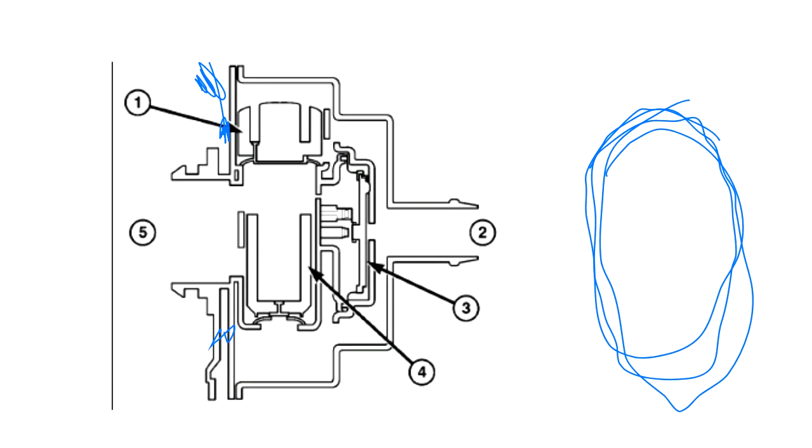Now, over here on the other side of this, so our charcoal canister sits here, sits over here. This is our canister. But over here on this side is a hose that pretty much goes to a vent.

It goes to a vent. Usually sometimes it has a filter in it, sometimes it does not, depends on the vehicle, and that's where our fresh air is going to come from. So this is going to hook right on there where the fresh air vent on the charcoal canister would be. So this is going to be that big hose on the charcoal canister.

And we're not even going to put a hose on it. We're going to put the ESIM switch on there. Then the hose hooks onto the ESIM switch. So that gives you an idea of where this item is located, right on the charcoal canister.

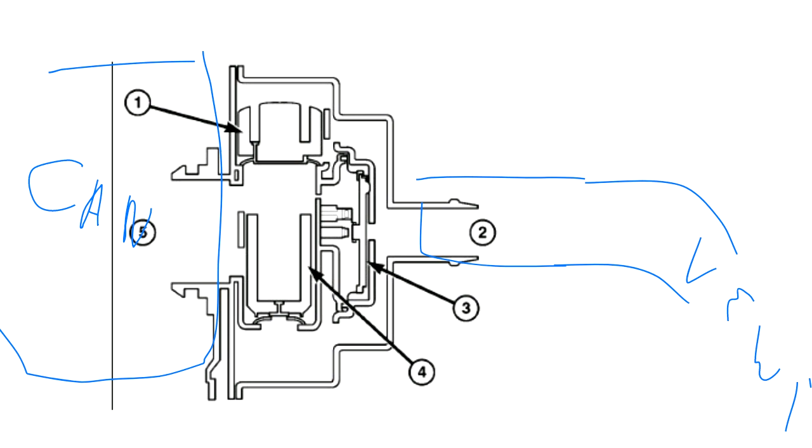There is a connector that goes to it, a 2-wire connector, because there is a switch in here, right in here. This is the switch. So the switch, you can see one terminal is here, one terminal is here.

So the switch, all that happens with this is we're going to let nature do her thing. If you don't understand what I'm talking about, a natural vacuum: if something gets warmed up and you seal it off and then it cools down, the pressure inside is going to decrease. It's what we call natural vacuum.

If you want a good idea of how this works really fast, go take an empty 2-liter bottle or plastic drink bottle, turn on the hot water on your spigot and fill it up with hot water. Dump that hot water out and immediately put the cap on it. You're going to have a lot of hot air in that container. Sit it on the counter and it'll probably take about 5 minutes and you're going to actually hear it crush itself.

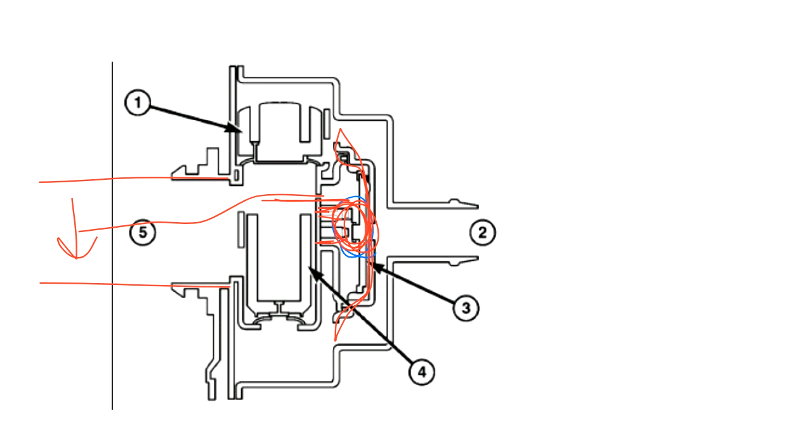And there is a diaphragm that comes across here, and right here in the middle of the blue is a metal contact. So you see where I just drew, and I'll clear that off so you can see it. So now if this diaphragm pulls inward because vacuum drops, that will make connection across these two terminals and it closes the switch.

That gives it its name, ESIM switch. This is actually called an ESIM detector. Stands for evaporative system integrity monitor, means it's all contained in one. The switch and the leak detector are all in one.

That creates the vacuum, pulls that diaphragm open or closed, and that closes the switch. The ECM sees the switch close, and it says, hey, we pulled a vacuum on the gas tank, on the hoses, and on the charcoal canister. We don't have any leaks. We pass the monitor. Very, very simple.

Now, there's a couple other pieces in this, and these pieces will tend to come into play and create a couple other problems for us. It's not uncommon to get a code for the ESIM switch, but the code for the switch generally isn't due to a switch failure. It is generally due to a piston failure. There are two weighted pistons, or valves, call them what you will, in this assembly, and they do different things for us.

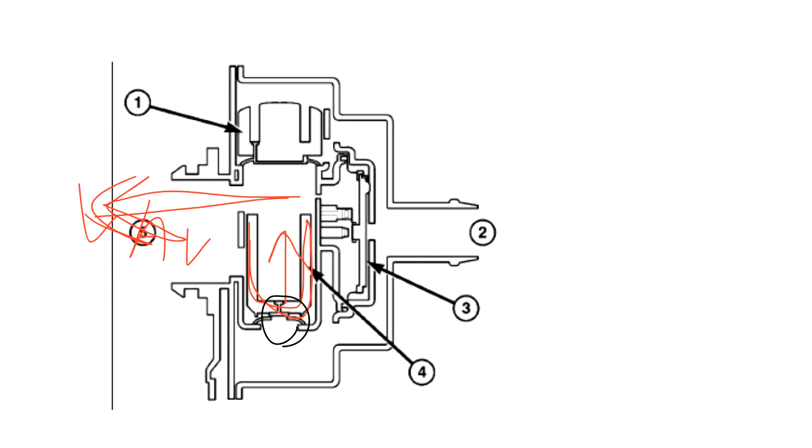So if we produce a vacuum inside of the tank, then we are trying to pull air out of this cavity. So air is trying to leave out of here, and it will lift this valve straight up. And right here at the very bottom of this, you'll see an opening. So if that valve lifts up, we uncover that opening, kind of like picking the stopper up out of the sink to drain the water, and air now will be able to come in through the vent hose, come right in around here, up through that valve, and come over and replace the air that's in the tank till the pressure is relieved. And when the pressure starts to equalize, then the valve will drop back down. Really simple. No springs. It just goes off of the weight of the valve.

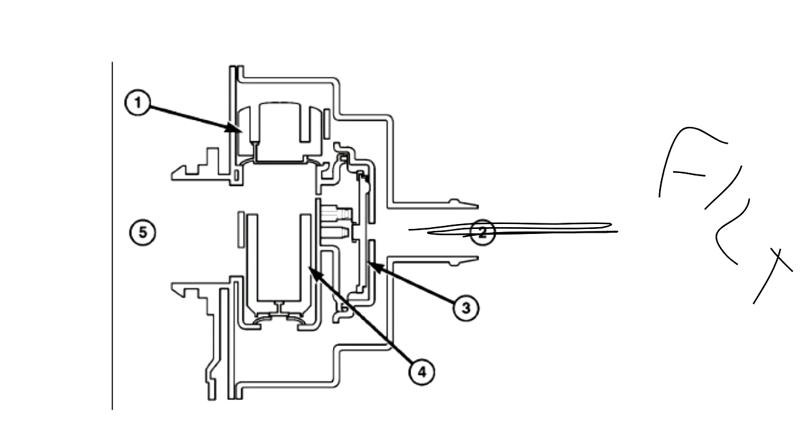And it's calibrated so it takes a lot more vacuum than what it takes to close the switch. Well, what if that valve got some dirt into it? Remember this air that's coming in over here from this fresh air? What if it gets some dust or some dirt in it? So there should be a filter in line. There should be a filter in here so we get fresh air in. It's not a replaceable filter. You can get them, by the way. You can get them if you have to, if they become clogged. You can get them, but it's there to try to make sure we keep clean air. So if you get one of these sticking, don't be afraid to replace the filter on it along with it.

If air comes in and we get little pieces of dirt in here, what if some pieces of dirt got up on that seat? It could make that valve stick. Now we've got a leak. We'll set a code for the ESIM switch because we never see it change states, but it could just be the valve sticking.

I will tell you, I have taken these out before and shaken them around, and you'll hear the valves moving. You shake them lightly and you can hear the valves kind of jumping around in there. I have done that before, put them right back on, and they would work. It would take care of my problem.

The problem is there could still be some dirt in here that the next time this thing inhales air, it gets stuck in that valve. So if that happens, get a new ESIM switch.

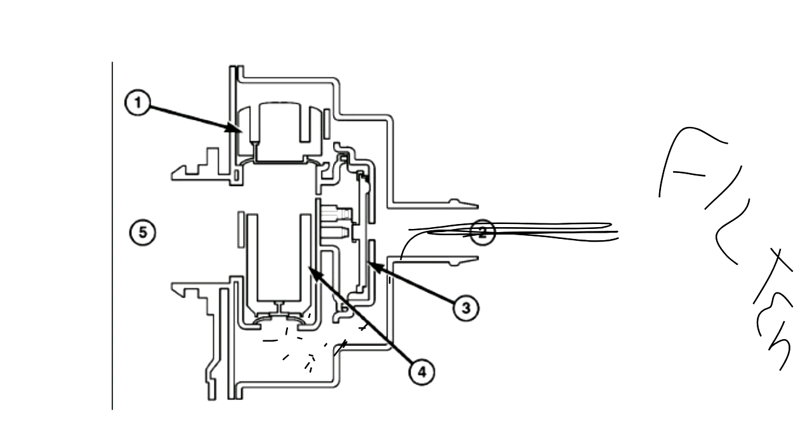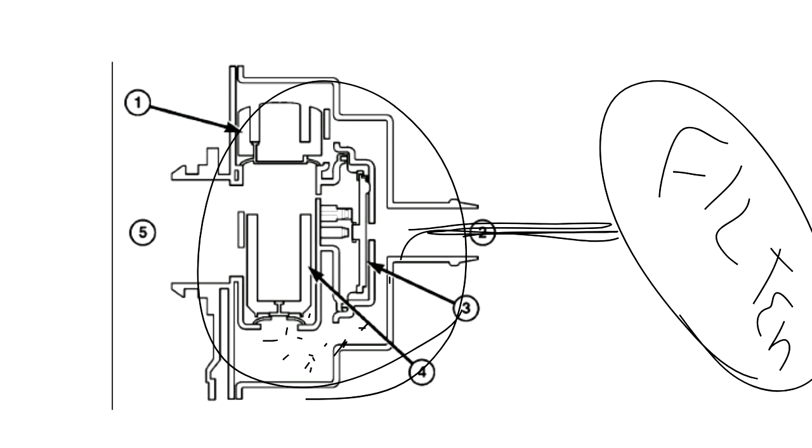I'm going to get this whole assembly right here and replace it. And if it's got higher mileage on it, or if there's a lot of dirt under this vehicle, looks like they live on a dirt road, or maybe they like to go off-roading, I'll probably get this filter and replace it along with it. Blow the lines out while you've got it loose, just blow some fresh air through them. Try to dislodge any dust and dirt that's in there and get it out of the line. Put it back together—it'll help get rid of a repeat failure.

Now, what's the other version of this? I get up in the morning and get ready to go to work, and it's 30 degrees outside. I head into work, and while my car's sitting outside, let's say it warms up to 60, 70 degrees outside. That pressure has built up inside the gas tank, so there's got to be a way to get rid of the pressure.

Now, if this is pressure inside of here, pushing through, it's going to push this valve down. That's just going to seal it off even better than it was sealed off before. So that's the job of this one right up here.

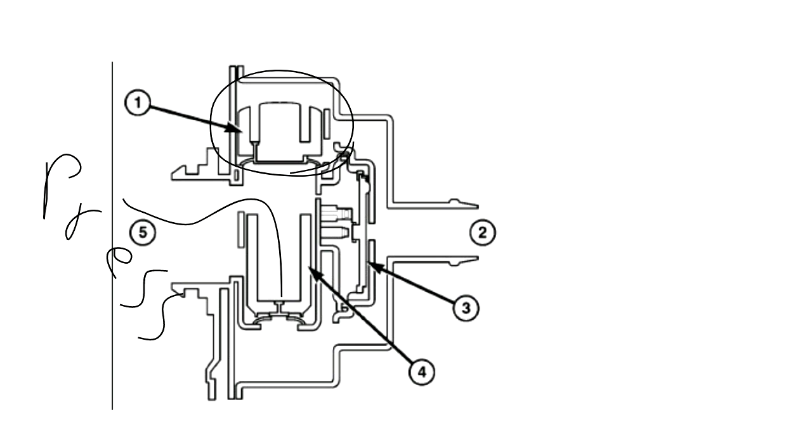So the piece on top that you see there—if we get pressure coming in, trying to get out of that tank, it's going to push up on this valve. It will move up, and now the air will go right through the side of this valve and right out through the filter. So the one on top relieves pressure in the tank.

The one on the bottom relieves vacuum in the tank, and it doesn't take much—2 to 3 psi, and the valve on the top dislodges and releases pressure. 4 or 5 inches of vacuum, and the one on the bottom is going to move up, dislodge, and allow pressure into the tank so we don't collapse the tank. Fairly simple system, right?

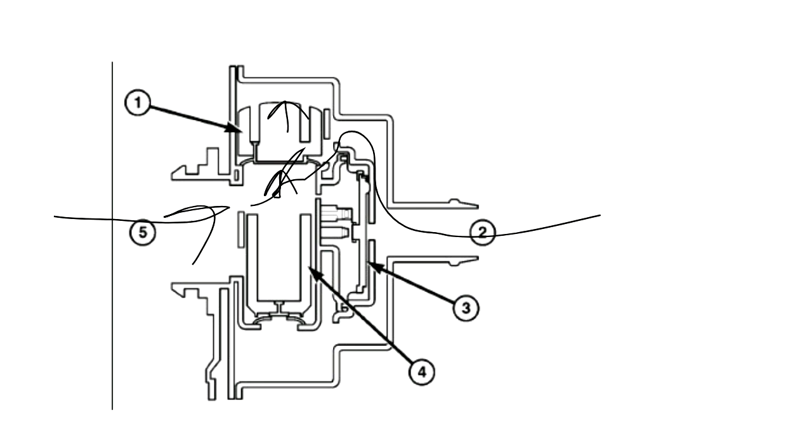Well, there's one more piece to this animal, and that is called onboard vapor recovery. So for onboard vapor recovery, the EPA said that when a gas tank's empty, it's not empty. It might be a 20-gallon gas tank with 2 gallons of gas in it, but that means it has about 22 or more—maybe 25 gallons—of gasoline fumes in it.

So originally, and this has happened in some states—they hopped on it early, I think California is one of them, maybe Illinois—originally they came out and said, hey, you've got to recover all those vapors.

When you put gas in an older car, you may notice the gasoline smell around the car. You may notice it coming up if you stand there holding the gasoline nozzle—you're going to smell the gas fumes coming out of the vehicle. So what they did is they said we've got to capture those. We don't want, every time you get gas, to put 25 gallons in volume of gasoline fumes out into the air. We've got to capture those and recycle them.

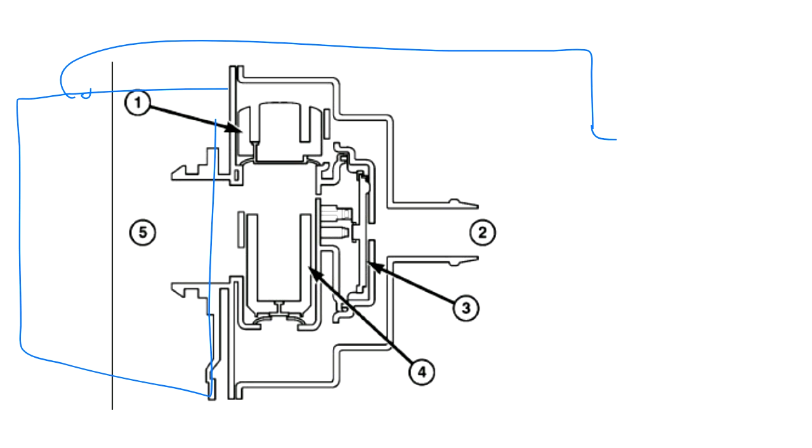Well, remember the vent line that's on top of the gas tank. It goes to the charcoal canister. So what we're going to do with this system is, when we're doing a refueling, our charcoal canister is this box sitting right here. It's got a line coming off of it that goes over here to our gas tank. I'll just draw a little gas tank, and here's a filler neck. So you're putting gasoline into the vehicle, pouring gas in here and filling up the vehicle.

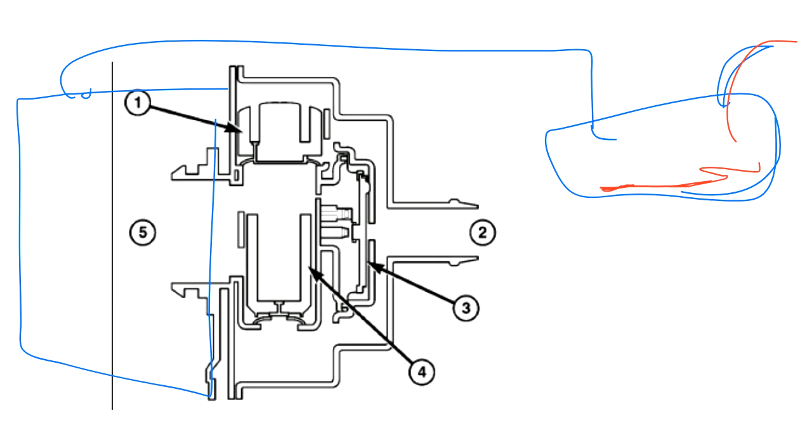While we're doing that, the fumes that are in here, all up in here, they're going to go up and follow this hose, come through the charcoal canister. We're going to capture all of the hydrocarbons, and the air, the oxygen, nitrogen, what have you, will continue on through and come out here. It pushes this valve off of its seat, and then it continues on out to the atmosphere. That's onboard vapor recovery.

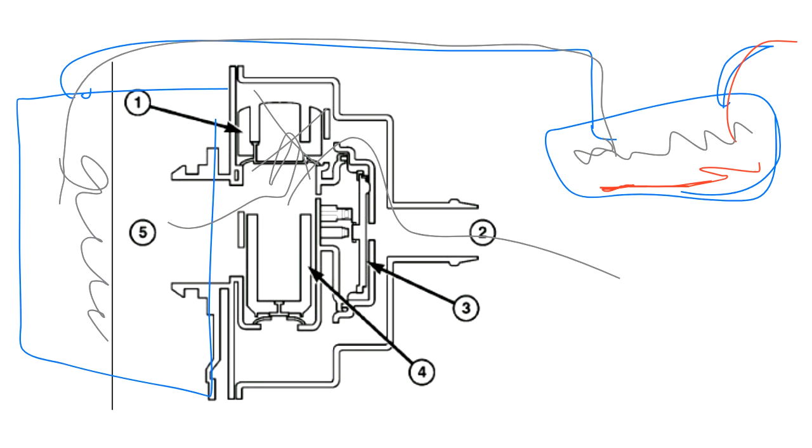To give you an idea of things to think about, what if this valve stuck? Now when I put gas in, the fumes try to go out. They get in here, but there's nowhere to go. So pressure builds. That shuts off your fuel pump, your fuel nozzle, and it doesn't take very much. It happens really quick.

If you can't get that air out, you're only going to get maybe 50 cents to a dollar of fuel in. You're only putting about half a gallon at a time before it clicks off, and then you've got to let it sit for a minute and try it again, putting a little bit at a time in the tank. If you got a big gas tank, like I do, a 20-gallon one, it'll take forever to fill this thing up. It can take half an hour to an hour just to get 20 gallons in there. So it's going to take a really long while.

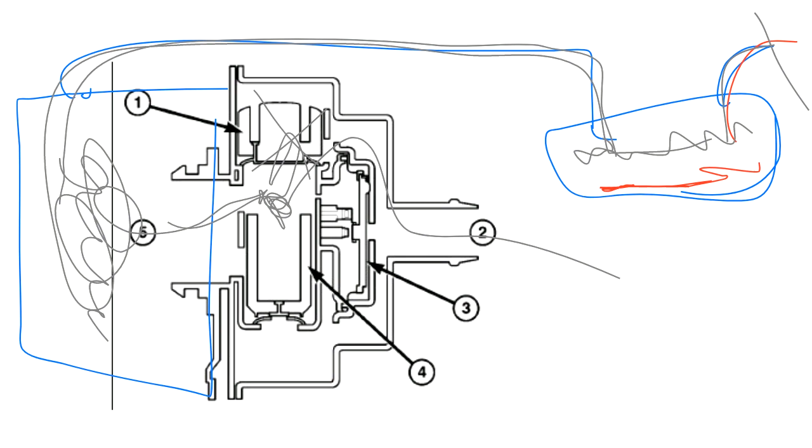So keep that valve in mind if you have a problem with putting gas in the car. That's called onboard vapor recovery.

So let's take a look at another system that we're going to use. That's a fairly simple system. Two wires, that's all we added to the car. Two wires and a switch, just an on-off switch. If we pull vacuum on it, it closes the switch, test is good.

So let's look at a system. This system is fairly common, though the slides I'm going to show you are from Toyota. It is a fairly common system. So look at some of these pieces that we've got. I'll just point out a few of these so you realize that we're there.

To start with, what's going to make this work is right here in the middle, we have a vapor pressure sensor. So this one, instead of being a switch, it's actually a sensor, and it's going to measure vapor pressure. This is basically a MAP sensor, the same MAP sensor we used on the engine. On a lot of cars, it is the same sensor.

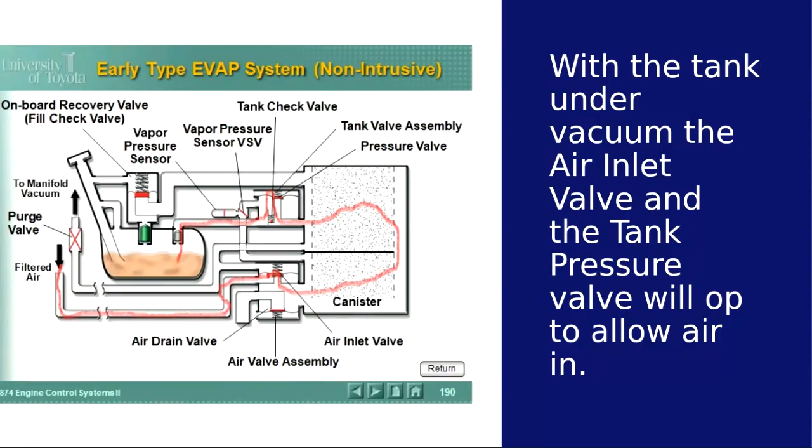So that's normal operation. Now, the next thing's going to happen with this is when we're trying to purge the system. So we're driving down the road, everything's working normally. Our computer says, hey, we need to clean all these vapors out of the charcoal canister that have been created in there from the pressure going up in the tank and the fumes trying to go out through the charcoal canister. We got to get those fumes out of there because it can only hold so much. So we got to get the fumes out of there and keep that tank cleaned out.

So what's going to happen while we're driving is now this other valve comes into play. Here's our purge valve. We're going to turn it on. That valve is hooked up to the intake manifold. So there's vacuum in the intake manifold. We're turning that valve on, and it will be pulse width modulated. So it's not just an open door. We're going to pulse it so we can control the flow of these fumes. Now, remember, we're not trying to suck fumes out of the gas tank. We don't want to do that. We could possibly suck some liquid fuel right out of the gas tank.

We only want to flow air through the charcoal canister. So what's going to happen is our vapor pressure sensor valve is closed. It's closed off. So there's no passageway through there. So our air is going to come in through our filter, come along here, in through the air inlet valve. It comes through the charcoal canister, and it is just drawn right back out through the purge line up into the engine. Fairly simple system. Works great. That's normal. That's the normal workings of this sensor.

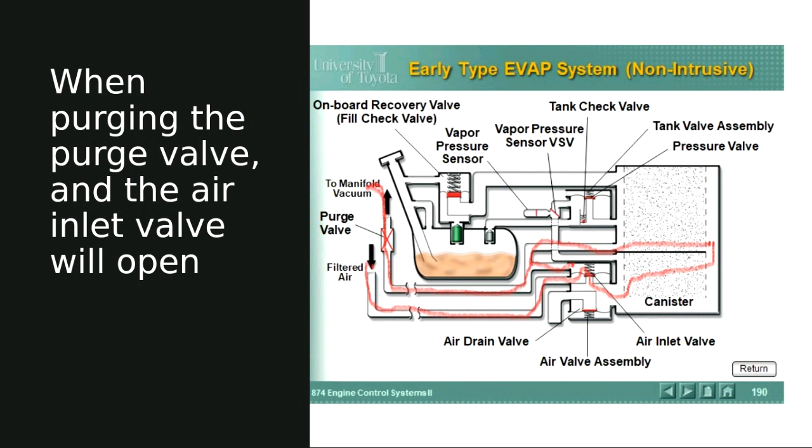Now, when we want to do a test, we want to test this thing to see does it work. We've got to test to see if this system is working properly. What we will do, and let me just make sure I don't think I have a picture on here of it. We've shut the car off.

So you've driven the car, you shut it off. What we do is we start a timer, and we're going to open this vapor pressure sensor. This vapor pressure sensor is open.

That connects everybody together. So if you look, that little red valve that you see right at the end of that line, it opens up. That connects everything together, and what it's going to do is connect the tank, our gas tank, as well as the charcoal canister, all of these hoses. It hooks them up to this vapor pressure sensor.

Now we let a little bit of time lapse, and it's generally hours. This generally happens over a period of hours. Time passes and intermittently the computer wakes up and looks at the vapor pressure sensor and sees what it reads. If it sees the pressure go down,

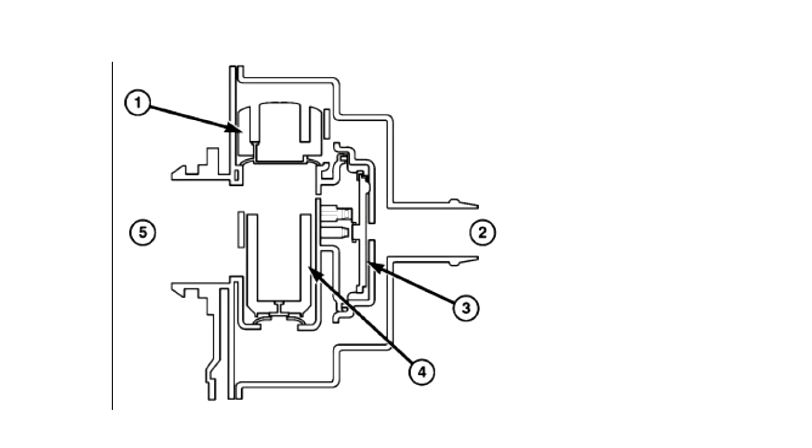so if we think about this for a minute, if we go back here to the system, if I was trying to push smoke into this system to pressurize it to see if I've got a leak, I'm going to have to get rid of this leak, because as soon as I put pressure in here, this valve's going to unseat. I'm going to have smoke come out through here. I'm not going to be able to pressurize it. So I'm going to cap this off right here. That's going to seal my system up and make it work.

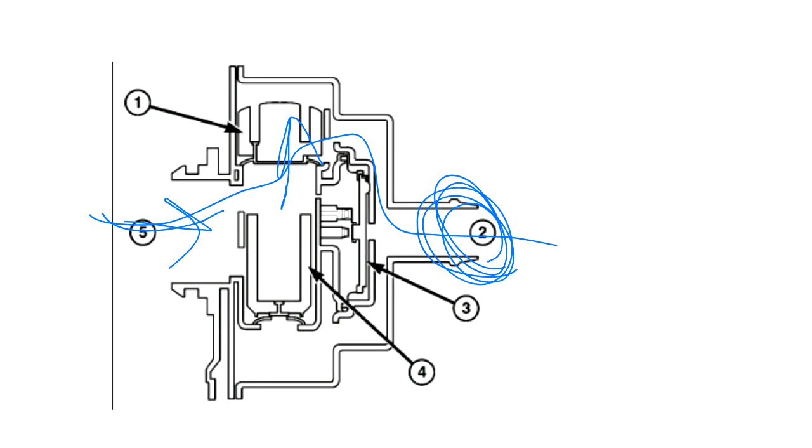If we look at the other system, if I'm going to pressurize this with a smoke machine, I'm going to have to take a look at some problems here. If I allow pressure to build up in here, it's going to come out here.

Or it's going to come out through here, one of the two. So I'm going to have to find a way to block those off so I can pressurize my system. Also, depending on where I pressurized it, because of this vapor pressure solenoid, I might only be pressurizing part of the system. So understanding what has to happen, I've got to have this valve opened up in order to test the whole system. Otherwise, I'm going to have to test it in two pieces.

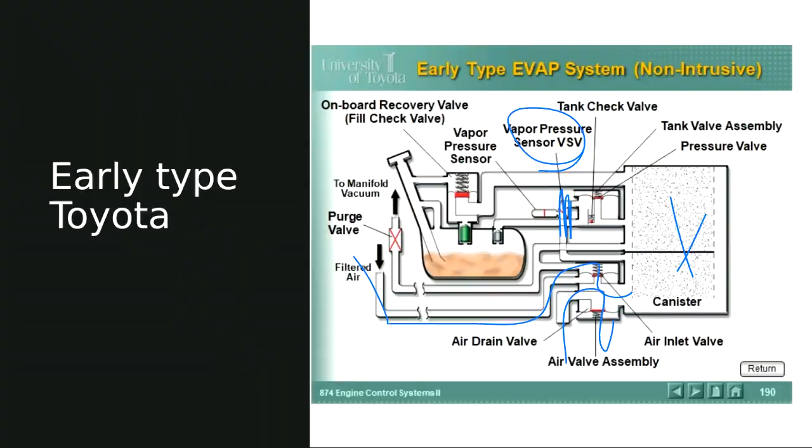So I'm going to use a scan tool to do that, and we'll take a look at some of that next week. But this is why I'm just pointing this out to you, because now we've got another system here, and this is why we need to know how the systems work.

So we've looked at two types of systems that use vacuum. We looked at the one on my Jeep that uses the ESIM switch, and then we looked at the Chrysler early, or the Toyota early system. Both of those use vacuum to test and see if they have a problem. We looked at one system on my Jeep that uses pressure to determine if we have a leak. Now we're going to look at another system that uses pressure to determine if we have a leak, and this is a Toyota system that we use.

So this system is called the Toyota late system, and what it does is kind of interesting. I used these slides from them so I could point things out.

This is going to show you where we have pressure, and it's going to show you where the parts are. This section over here is going to show you if you tapped into this pressure sensor. We've got a pressure sensor right down here in the bottom. So if we were monitoring the pressure, this is going to show you what's going to happen to the pressure over here. And we've got some solenoids. We've got a motor here, and we've got an Evap solenoid right up here. We have a canister vent valve right here. And right in here, we're going to show you what we're doing with those, whether we're turning them on or off. So we're going to go through the whole test system to see what happens.

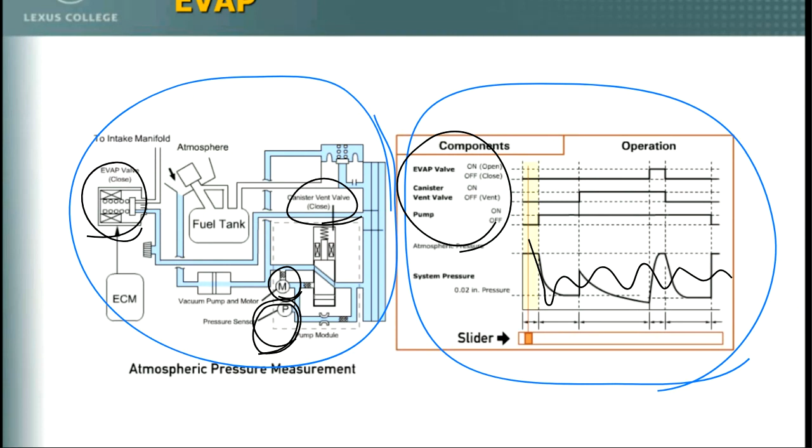And this is the test. The rest of it, checking to see what happens for onboard vapor recovery and all that, you can kind of figure that one out on your own.

Now, our fuel tank's over here. Let's just think about this for a minute. So if I was putting gas in the car, how would the onboard vapor recovery work? Well, let's draw it out. Gas comes in, fumes have got to go out, right? So fumes are going to go out here. They're going to come up here to this valve. That is our onboard vapor recovery valve, and we're going to push this off of its seat. Fumes are going to go through the charcoal canister, then they are going to come right out through here, and it's going to come right out through the filter.

Fairly simple. Now notice the pressure here in this white area underneath is greater than the pressure on top. Notice this is vented right down through here. So if the outside pressure is greater or is less than inside pressure, this valve opens up and allows that to vent through the charcoal canister. We never allow it to vent straight to atmosphere. We want to catch those fumes. So that's just to show you, you can look at these and kind of figure out what's going on as you look at them, once you start realizing what the parts are and how they're connected together.

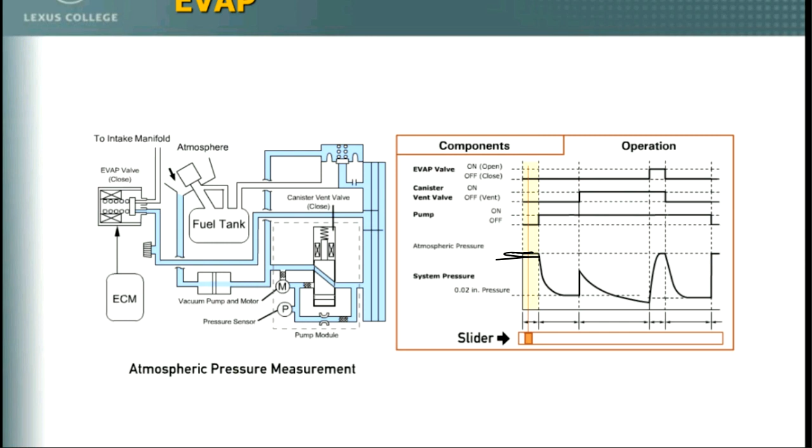In order to do that, we're going to turn the pump on and see what happens. So now we're going to turn the pump on, and you can see up here on our graph that our pump is now on. Our pump is turned on. Our canister vent valve and our purge valve are both still turned off. And when we turn that pump on, it's going to try to pull a vacuum on the system.

But since the canister vent valve is off, let's see what happens. As this pump tries to pump air out and pull air out of the system, air is basically going to flow through this valve, down through here, and come right back over. But there's an orifice right here. This is what I want to point out. They put this orifice right here in this line. That's a 20 thousandths of an inch orifice.

So basically what they're saying is this is what the pressure would be today under these conditions, under this temperature, if you had a 20 thousandths of an inch leak. And that's the reading we're going to get right here. So these are just reference points.

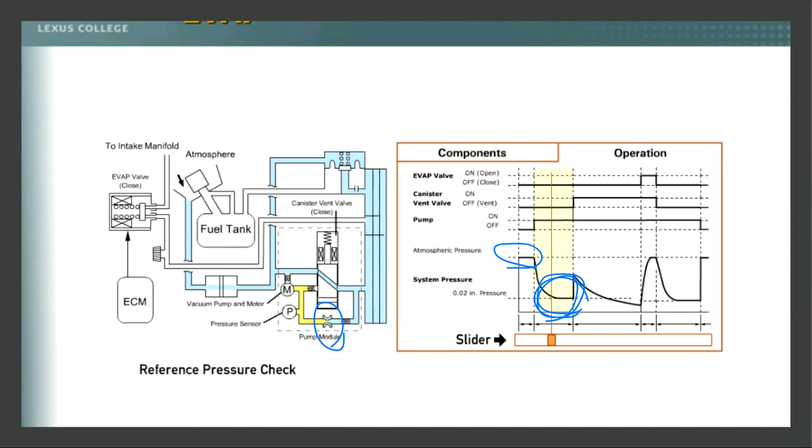So now let's leak test it. When it goes to the next step, the very next step in here, what we're going to do is we turn the canister valve on. Our pump is still on, but the canister vent valve just got turned on. And look what happens when it moves.

When it moves, we blocked off the vent right here. That vent got blocked off. We opened a passageway up through the middle of this from the pump motor straight over to the charcoal canister. So basically we took that orifice out of the pressure line because now we have an open system. So now this is open.

By the way, you'll see three of them. There's one right there, there's one right there, and there's one right up here. There's three blue marks that I just put on there. One right above the pump, right here. One right here before the canister vent valve, and one right here. Those are filters, so that we don't get any dirt into the pump and we don't get any dirt into that orifice.

If they clog, then you get the new component. Then you end up having to get the new piece because most of this is going to come as an assembly. You get this as an assembly, and so you get all new filters with it. So it is possible they could clog, especially if our charcoal canister came apart. But if they do, we'll get some codes that nothing's going on because nothing will flow through there if that happens. But that's what those little hash marks are that you see in there. Those are filters that are in the lines. You cannot replace them separately. So if they clog, when you trace them out and find a clog in that line, you get a new assembly.

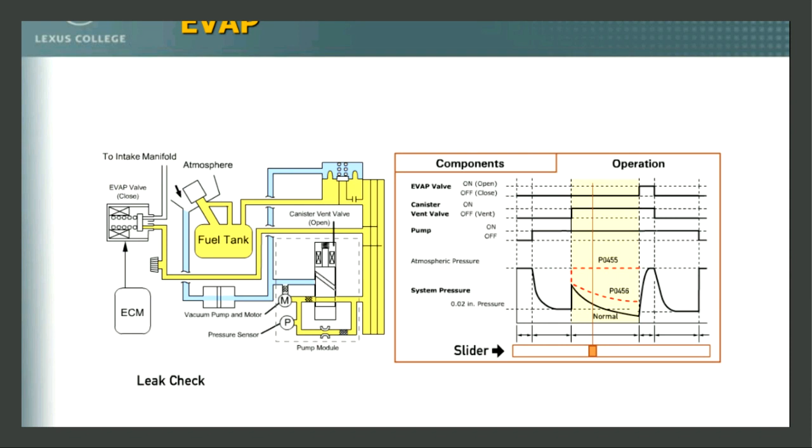So if we make it past this section, once we make it past this section, we're not done testing everything yet, because we have some other components we got to test. So we're going to move on to the next section here, and we got some other stuff to do. Let's see what happened.

If you look up top, what happened, our pump is still running, but what we did is we opened the evap valve. So we opened the evap valve up with the pump running. Basically we created a leak in the system, and it should be a fairly large leak.

And what we're looking for is the pressure to come back up, or the vacuum to decay, whichever way you want to put it. We're looking for it to head up towards atmospheric pressure, because we just created a large leak in the system.

If we see that, that works. If it stays down at a vacuum, then we're going to set a code.

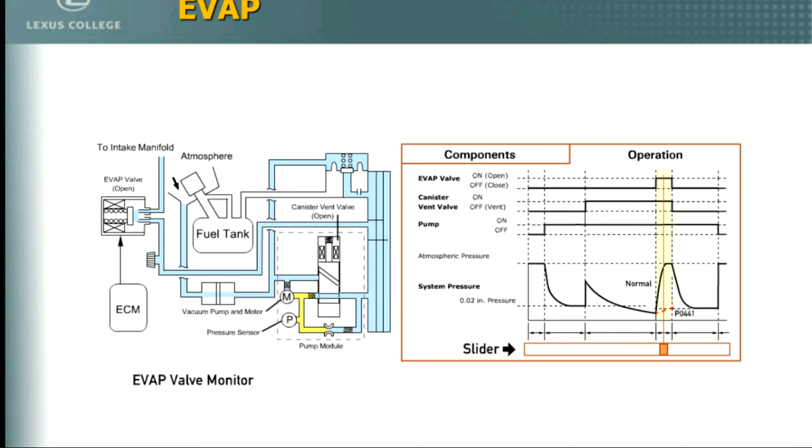Then we've got one more step that we're going to do here. Just to re-verify that everything is good and all the valves move back to where they were supposed to go, we're going to go one more step, and we're going to go right back to the beginning again.

So right back at the beginning where we were, the pump is on, the canister vent valve is turned back off, and the evap valve is turned back off, and we should get the same pressure that we had when we started. So if we have the same pressure here and here, then everything's good. If we don't, one of these valves got stuck.

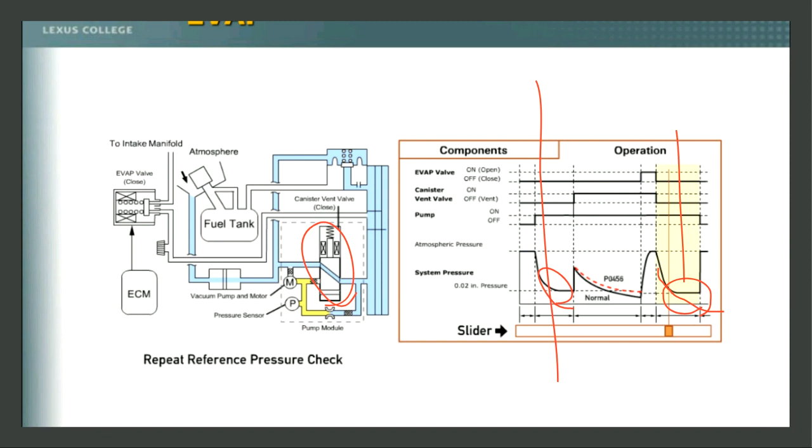So if, for instance, this pulled back down into a vacuum, either our canister vent valve is stuck, or this orifice is totally clogged. One of the two.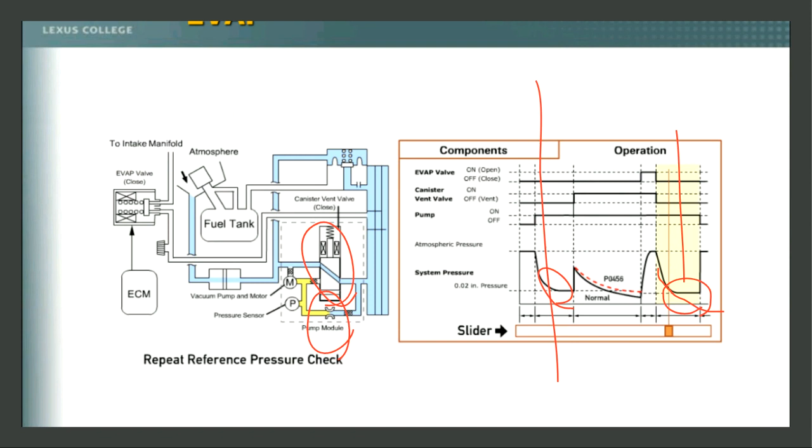So do you kind of see how that works? You got to kind of get into these systems and see what the manufacturers intended. How did they build them? What did they design them to do? Because that's what we're looking for.

What are we going to do with these systems? How do they work? Every manufacturer's system is a little bit different, but they really do all work just about the same. If you can understand one, then you can kind of look at the layout and the description of the others, and you'll be able to figure them out. And that's what we're kind of working on here.